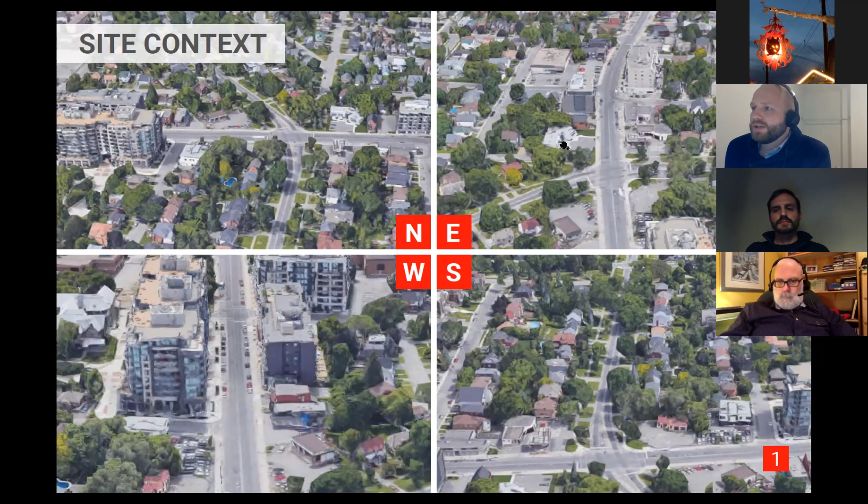Looking west, you can see our site in the foreground, and the Ashcroft buildings further west, beyond Leighton Terrace. You can also see the northwest corner of Richmond and Island Park, which is a used car lot gas station site. Finally, looking south, you can see the Esso gas station on the southeast corner of the intersection, and Island Park Drive continuing south.

More specifically, our site frames the corner of the street. It's set back a fair ways from the existing street edge, and it extends about halfway across the block between Island Park and Leighton Terrace. There's a public laneway, which we'll discuss in a few minutes as we get into the design, that runs between the subject property and the former car dealership to the west, adjacent to Leighton Terrace.

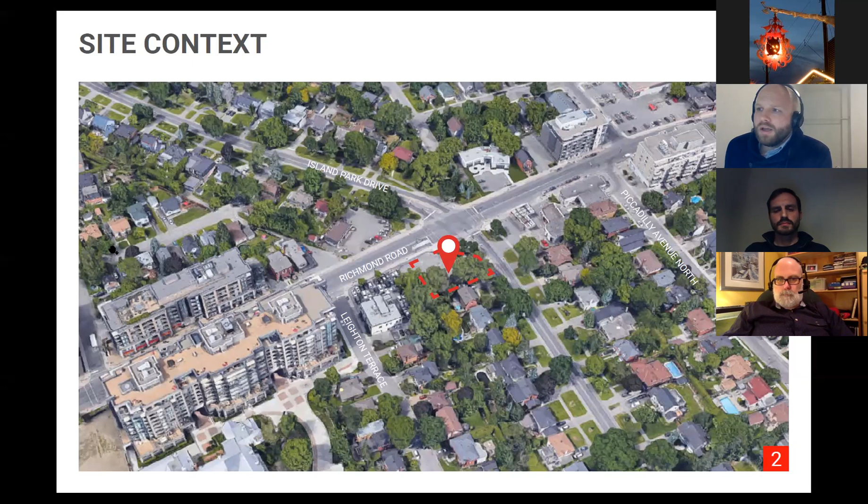In terms of a high-level overview of the development, Rael will get into quite a bit more detail later in the presentation, but the proposal is a 9-story development containing 60 residential units, as Fiona mentioned. There's around 360 square meters of retail space proposed at grade, which includes within the retained heritage gas station and wraps around onto Island Park Drive. There are 37 vehicular parking spaces proposed in 2 levels of underground parking.

The underground parking and loading is all accessed from the west facade of the building and from that public laneway, as I mentioned. So we've set our building back to provide a 6-meter access way that will serve both vehicular access as well as moving trucks, garbage trucks, and that sort of service use. Finally, there are 32 bike parking spaces proposed within the parking garage as well.

The landscape plan for the site includes improvements along both Richmond Road and Island Park Drive, and a landscape feature at the corner of Richmond and Island Park, which Rael will get into a little later.

In terms of a high-level overview of the policy context for this development, the site is designated Traditional Main Street in the Official Plan. The Traditional Main Street designation encourages mixed-use, compact, pedestrian-oriented development. It is a target area for intensification in the city's Official Plan, and it generally permits mid-rise building heights up to a maximum of 9 stories.

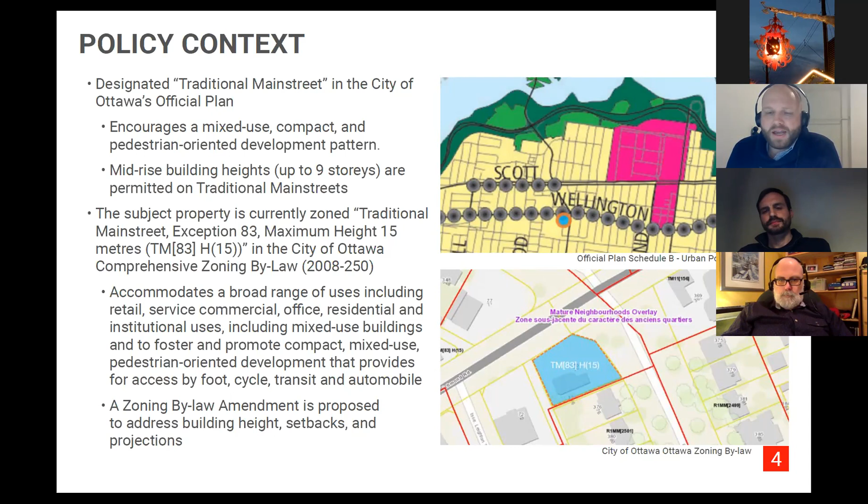The property is also zoned Traditional Main Street and has an area-specific exception, Exception 83, which permits auto-related uses on corner sites. The maximum height currently permitted on this site is 15 meters. So the proposed uses, residential apartments or condos and retail space, are both permitted uses in the current Traditional Main Street zone, but we've submitted a site-specific zoning bylaw amendment application to address the building height, some setbacks, and projections above the permitted height limit.

The property is also within the Richmond Road Westboro secondary plan and CDP areas. The site is located in the far right-hand corner at the corner of Island Park and Richmond. It is within the traditional Main Street, where residential infill and redevelopment is encouraged. Generally, building heights are in the range of 4 to 6 stories, and the subject site is currently designated for 4 stories in the secondary plan.

The secondary plan does make specific provision for where greater heights may be appropriate, and those are listed here: where height conforms to the prevailing heights in the area or provides a transition between heights, where the site is a community focus or a gateway location. This site, given its location and entry into Westboro, incorporates community benefits that enhance the Main Street. Again, the site is retaining the heritage building, which contributes to that Main Street feel, and where the design policies and objectives of the official plan are met.

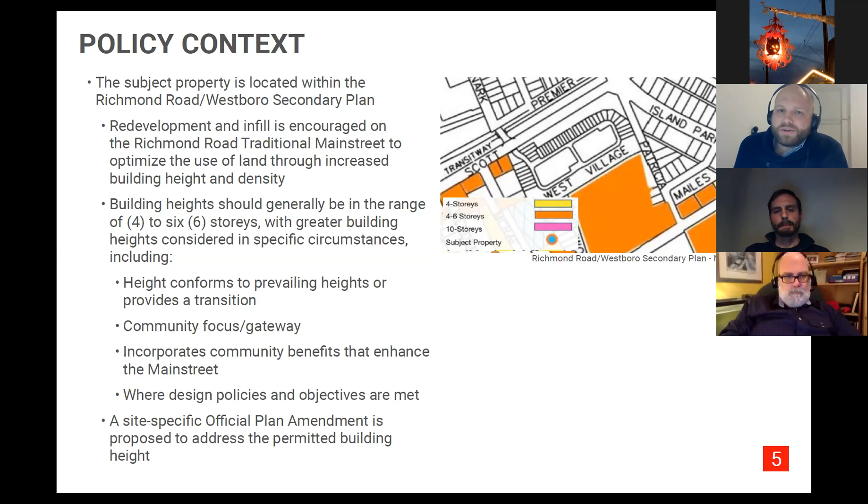Those provisions are contained in sections 2.5.1 and 4.11 of the official plan, with 2.5.1 containing broad design objectives and 4.11 containing more detailed design criteria policies. We've looked at each of those. A site-specific official plan amendment has been submitted to amend the schedule of the secondary plan to permit the proposed 9-story height and to address the depth of lot policy, which also is contained in the official plan regarding taller buildings.

At this point, I'll pass it over to Rael, who's going to continue on with the presentation.

Thank you, Paul, and thank you, Councillor Leiper and Josh Howell. Nice to see you again. It's been a while, and thanks everyone for joining us this evening. I'll be brief with my presentation, and hope to take a little bit more time to listen to what you all have to say about this proposal, and to engage more in a conversation together.

If you go to page 9, Paul, that'd be great. We have been working on this proposal for quite some time now, and most of you recall we had come forward with a 7-story, 8-story, and 9-story development proposal. In all of which, I believe, was the only proposal where we were able to retain the heritage garage and the heritage building, in fact the 8 and 9-story option, and that was to the benefit of the greater community. I think it was really to reach out and make sure that we were able to attain that heritage preservation.

Just to start off, there were some key design themes I want us to focus on for the conversation, and that's really about heritage preservation, the public realm, the site access, as well as the street animation and pedestrian experience. Then we'll get into the building form. If you can go to the next slide.

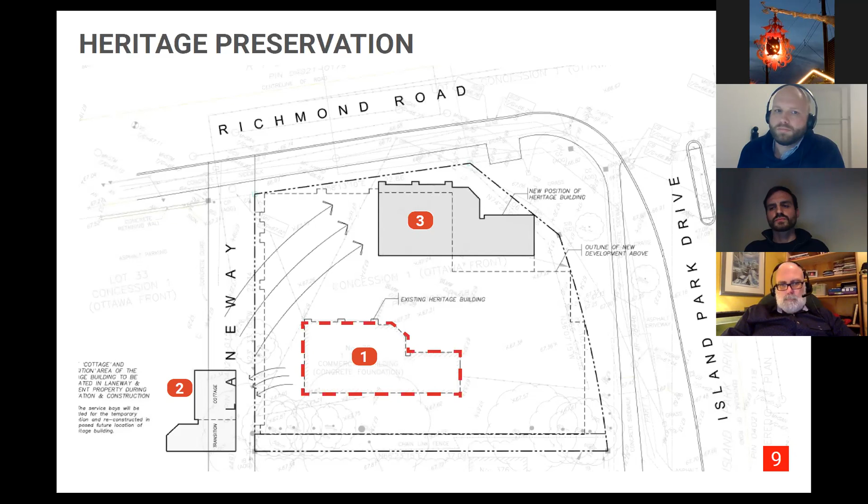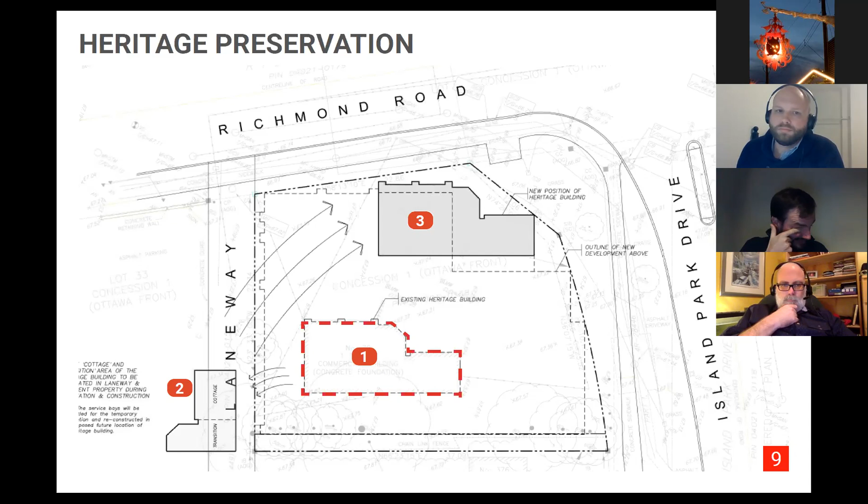You're all familiar with the current position of the Champlain oil gas station, and it sits way back on the site, and we are essentially going to preserve it. We're going to dismantle the 2 garage bays and position the garage temporarily within the public laneway, and then reposition it once the excavation is completed and we're back at grade. We'll reposition the garage closer to the intersection and better connected with the public realm at the corner of Richmond and Island Park, and then reconstruct those 2 service bays. So if you go to the next slide.

This shows basically a focal point at the corner of Richmond and Island Park. We've designed the building in an L-shaped configuration in order to preserve and enhance the openness at the corner of Richmond and Island Park. So we have a feature landscape space with a bench, and it essentially opens up into a courtyard space that is framed by the existing Champlain oil gas station, where we will eventually get into a retail program that will animate the ground level plane.

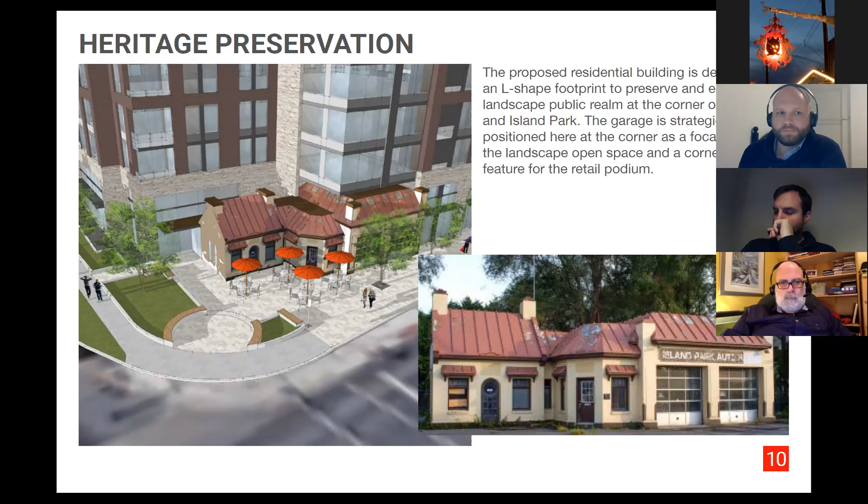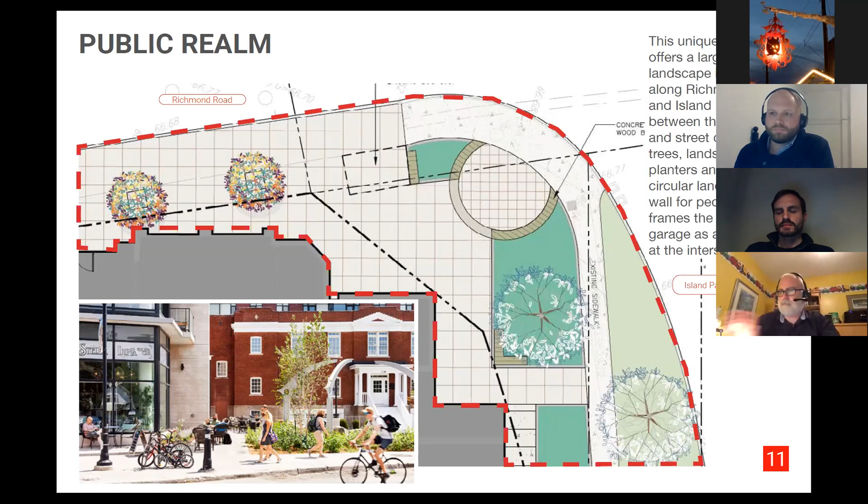to take advantage of that southwest orientation with the open public space in front of the Bethany Hope building. This will be a very similar condition with the enhanced public realm at the corner. If you flip to the next slide, we have the two precedent images of that project at 1140 Wellington, and our project on the left with the preservation of the heritage garage.

There's an emphasis on the material change for the ground plane, really creating and framing that garage with a single story podium. We're essentially boosting the heights to accommodate the full height of the existing garage, so that we can bring it into the building and engage with a contiguous retail space at the ground level.

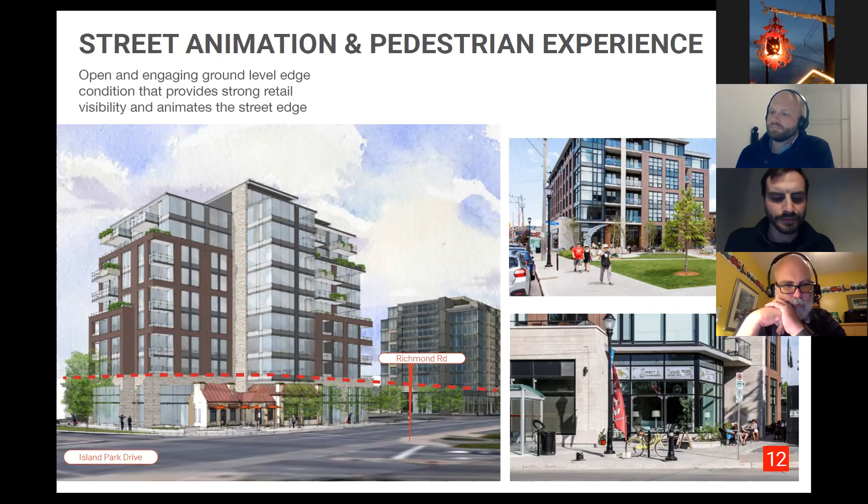The beauty of this, I think one of the biggest assets of this project, has been that public laneway, where we can remove any unsightly garage doors or loading spaces from the street and pull it into the site, creating a back of house component to the building. Waste management, move in, move out, and parking garage access are all managed through this public laneway access.

You can see both images on the left, a view looking at the building coming from the west, getting a glimpse of that side yard condition. If you can imagine, eventually when the auto site becomes developed, that will be completely concealed, and a continuous streetscape will be formed with that street wall.

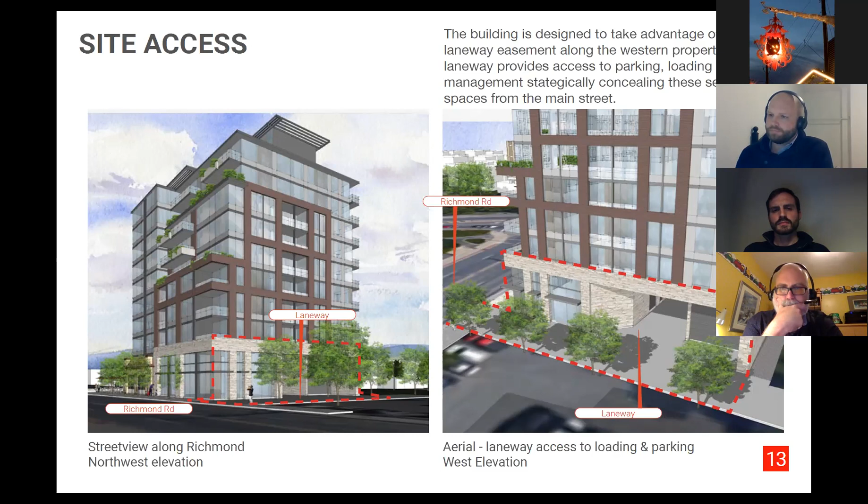So next slide. Building form - this is a 9-story building. I talked about the L-shaped configuration in order to preserve the open space at the corner, and you can get a glimpse of that on the left image with the open corner. The step backs - this building is articulated, the overall mass is broken down with step backs at the 5th floor and the 7th floor, both on Island Park and on Richmond.

More importantly, on Island Park, we've created that step back, a module that's 4 stories, which allows this to have a scale on that eastern facade that relates to the lower scale along Island Park. We have our continuous podium, which extends from Island Park around to Richmond, with the cornerstone being our heritage Champlain gas station. On Richmond, on the right-hand image, you can see the same transition exists on the traditional Main Street.

I think that pretty well sums it up. If you want to go to the next slide.

I'd like to finish by summarizing overall - we mentioned 60 units. Below grade, we've got 2 parking levels. Within P1 we have 17 parking spaces, and within the second level we have 20 parking spaces, for a total of 37. We're not boosting the parking capacity here - we're just meeting the minimum 0.5 rate for residential parking and the 0.1 rate for visitor parking, which summarizes to 32 parking spaces for residential and 5 for visitors.

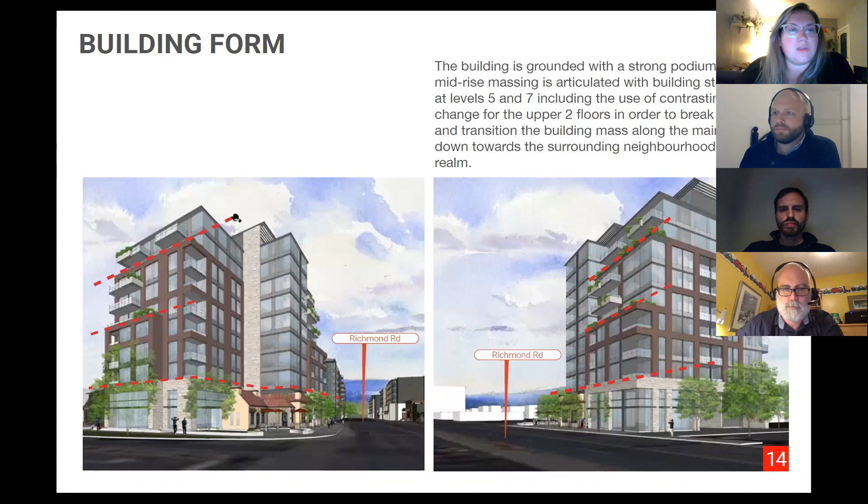You keep referring to a public laneway, but aren't you actually proposing a private driveway? So I can start and then hand it over to Andrew. As far as ownership is concerned, we don't own the laneway - it is in fact owned by the city. However, we are proposing to use it for servicing our site.

I guess that's the simple answer. Andrew, if there's anything you want to add.

Yeah, we're taking advantage of that existing laneway. It provides, as Riel went through, a really nice spot to put the garage door and loading away from the streetscape, and avoids any impacts from the adjacent signalized intersection. So it's kind of a win-win to have this publicly owned laneway right adjacent to the site.

Would a future development also be able to use that laneway if they're proposing any underground parking? I think so. My understanding is it's basically a city laneway, so it would have to go through the same application as this to permit access to it. I don't see anything restricting that unless staff or yourself have an issue in the future. No, I imagine a future developer next to you would also be using the lane.

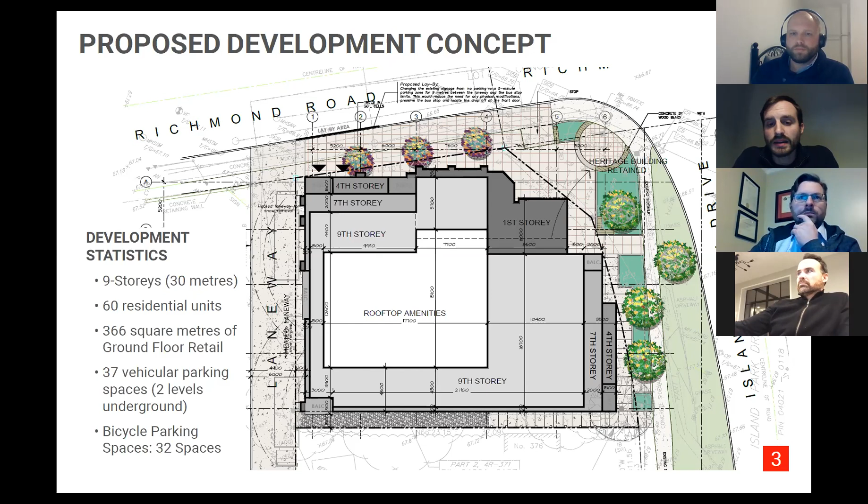You can see on that plan there is a pretty generous setback, and given the height of the amenity, the setback from the building, and essentially an angular plane down, I don't think there would be any overlook onto the adjacent homes on Island Park. Would you be willing to put up screening? If we look at that in detail and see there is a privacy concern, then we absolutely would be open to that.

Riel, do you know about the balconies? Yes, happy to report there are no balconies facing south onto that. All balconies are focused on the west, north, and east elevations, so no issues with any overlooking. There are a few bachelor units facing the south orientation, but they don't have balconies.

As far as the rooftop, everything is focused on Richmond. I think Aaron mentioned that, but I want to make sure there's no confusion that the rooftop amenity does not face east or west. There's a portion of it you can see on this aerial roof plan, but everything is focused along Richmond Road. The rooftop terrace as currently designed.

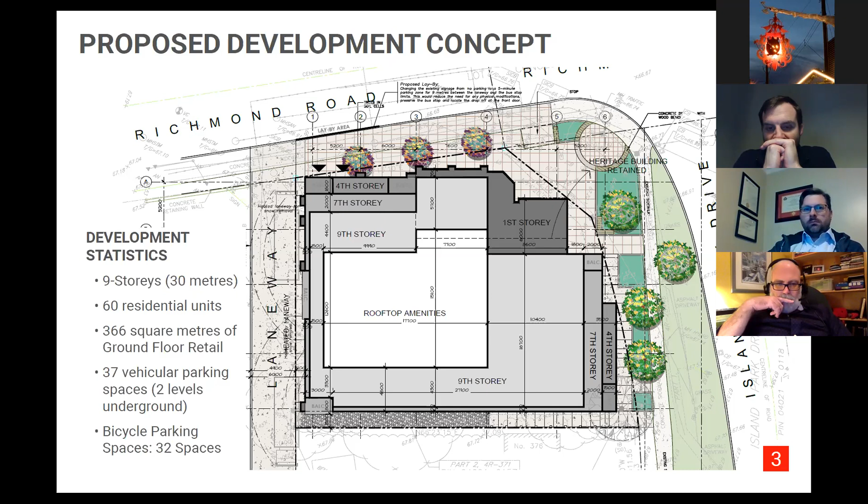Riel, do you know what level the windows would start at on that south side? Yeah, so the good thing at the ground level, we have a 6-meter ground level in order to internalize all of the retail, as well as the move in, move out, and the parking ramp. The parking ramp is located along the south property line, so there are no windows for the first 6 meters, it's just a flat stone wall. Then the second level would be at that 6-meter height where the windows would begin.

And what is the setback on that south property line there? Do you know, Paul? We have 1.8 meters.

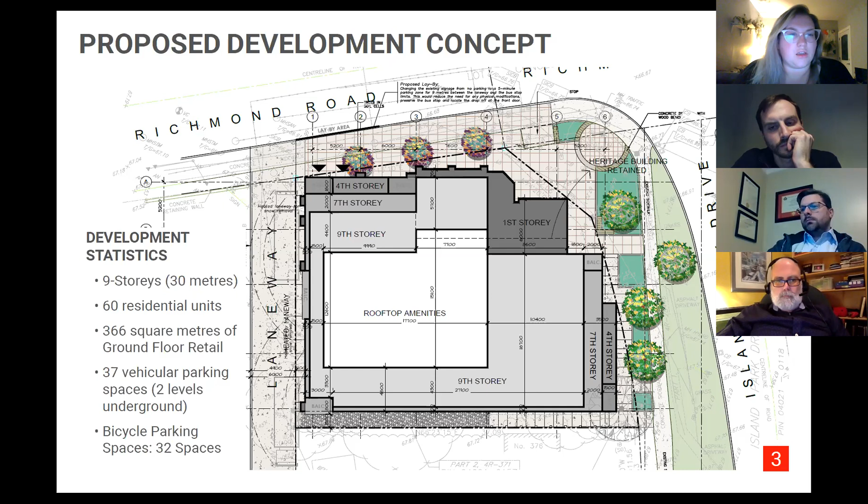Will you be posting proposed interior floor plans that show the configuration of the ground floor and apartment levels, circulation space, balconies, etc., or does this follow at a later stage? Our submission documents, the architecture plans, do include a ground floor plan that shows the demising of the space, as well as demising of residential levels above. So that is available on the city's website, in the DevApps package. Very shortly I'll put the link in the chat for those who haven't had a chance to check it out yet.

Can Andrew Hart please provide a copy of his traffic report to the community associations? That's also on the DevApps as well, so free to download. When that link's posted, you can go to it right away. I will provide a direct link to that very shortly as well.

Question for Jeff Leiper: how do we address issues with this intersection independent of this particular development? The angle at which people make a left turn from Richmond Road onto Island Park, the speed at which people go through the intersection to avoid getting stranded mid-intersection, and the proximity of the sidewalk to the street along that strip near the Mizrahi site. There's no immediate quick fix that I can point to, but I imagine that many on the call this evening saw the headlines around the 29 intersections that need safety improvements.

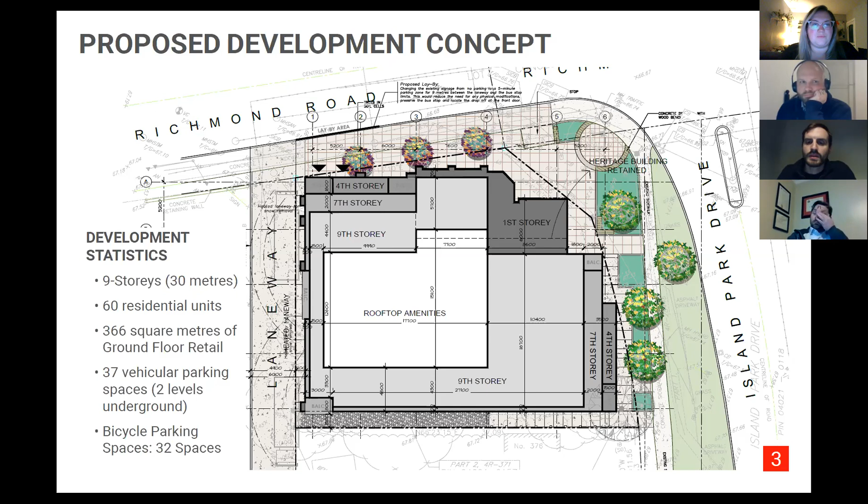With respect to landscaping, on-site landscaping would be the responsibility of the condo corporation, and off-site landscaping would be the responsibility of the city. With respect to retail, presuming Trinity continues to manage, we would sign leases, manage tenants, and ensure the spaces are leased out and maintained in good working order. However, if it is a condo and the units are sold, then any long-term obligations with respect to maintenance would be the responsibility of the condo corporation.

Thank you. You are asking for 7 zoning exceptions. What's the point of zoning? This is a question for Jeff.

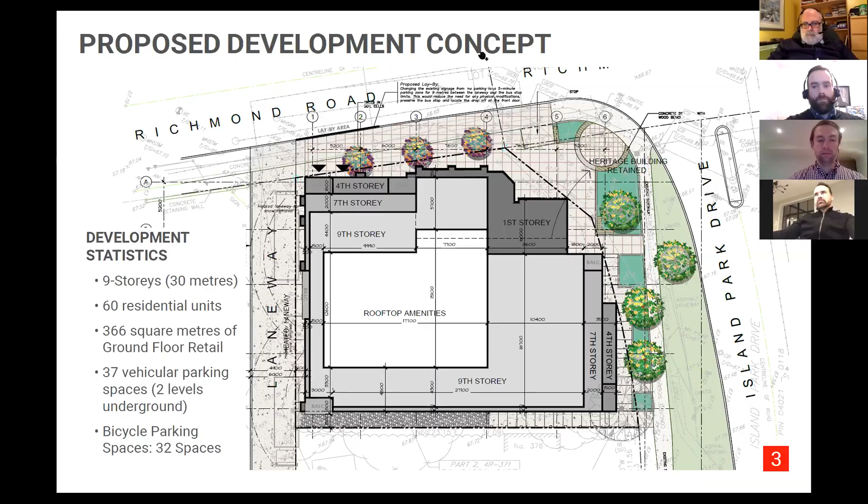New development throws off school development charges, right? I see. Yeah, so Paul's nodding. Yes, it would. So as we grow, the school board takes advantage of money for growth, and then it allocates that according to where it sees the growth.

We're going to see a new school in what we're calling Gladstone Village, the new OCH community at the corner of Gladstone and Loretta, just on the other side of the tracks. There's going to be a big new population there. The school age population has grown, and I believe it's the English Catholic Board or the French Catholic Board that's going to build a new school there. They see the population need. It's a bit of chicken and egg, but the density drives the school board decisions, and they are reactive based on what they're seeing in terms of the trends.